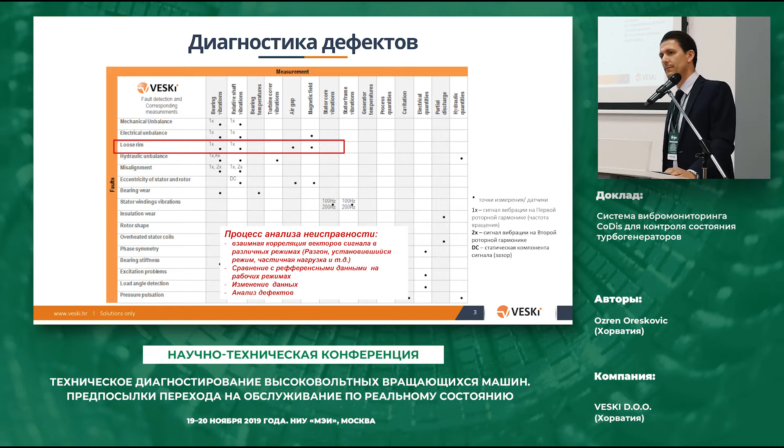And then do that for other signals that we need to address the problem. And then we need to combine the information together. But also, we need to know in which operating condition the machine works.

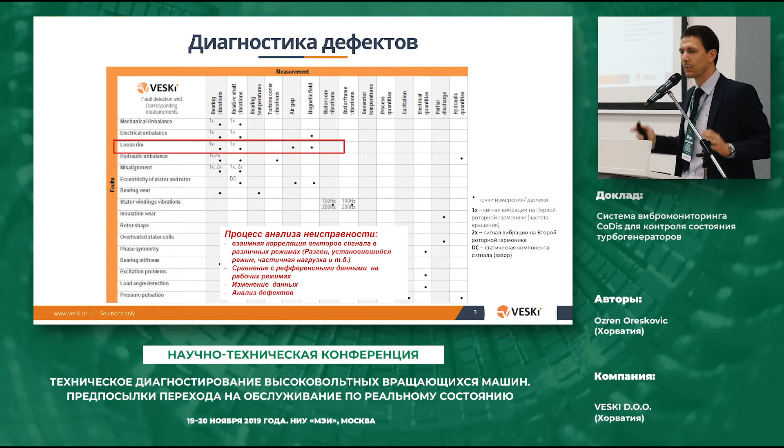So, of course, first we need to measure. So measurements are most essential.

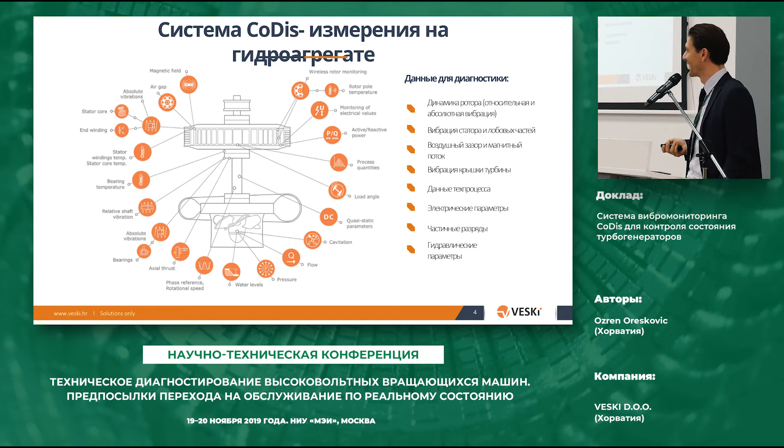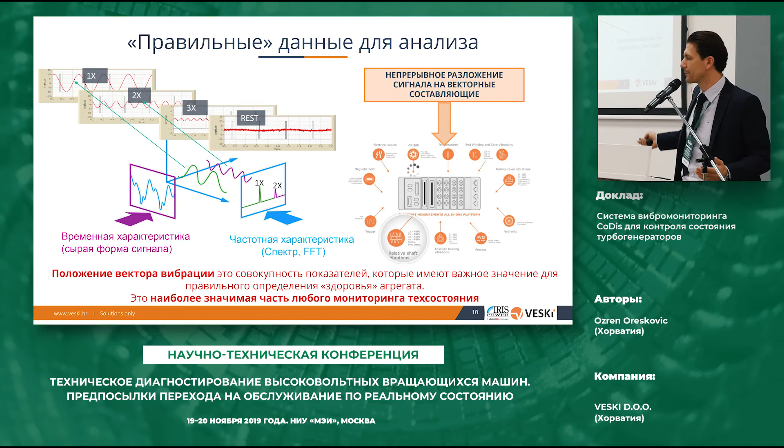And this is all based on industry standards.

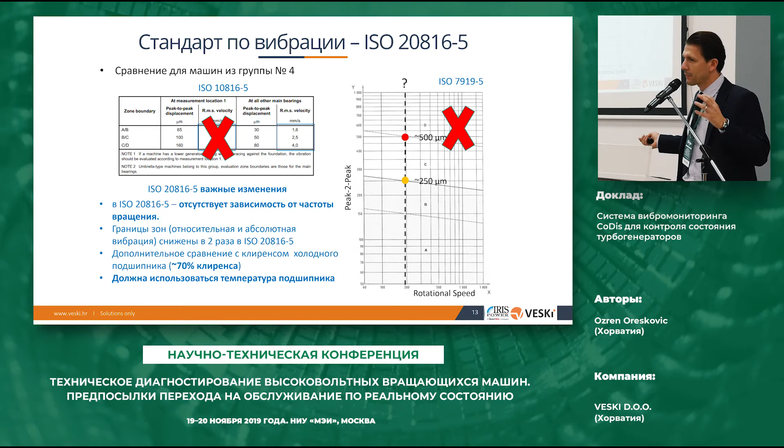The new standard is basically a little bit better and it focuses on an actual physical phenomenon rather than just a number.

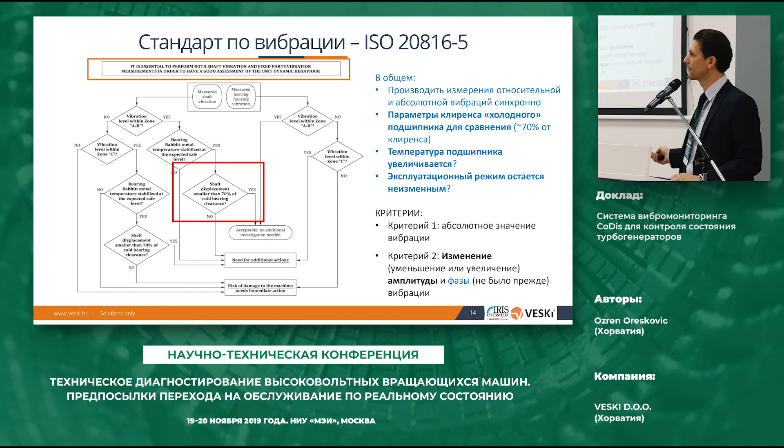I'm skipping slides because I have only 3 minutes. I thought I had 20, 30.

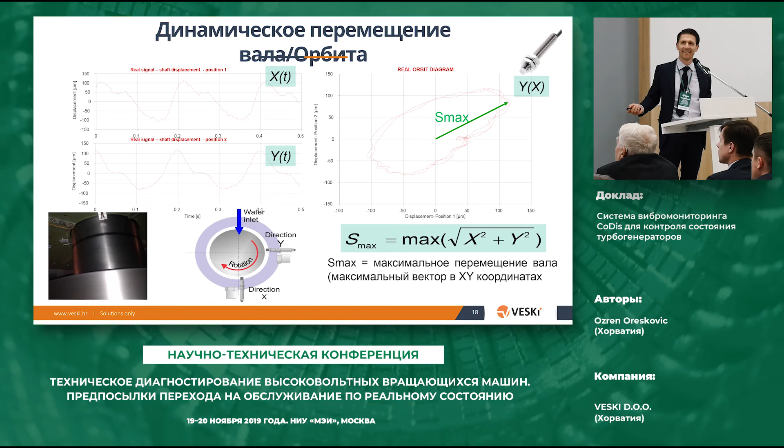So the idea is basically to correlate all the data and make the diagnostic functionality easy to interpret.

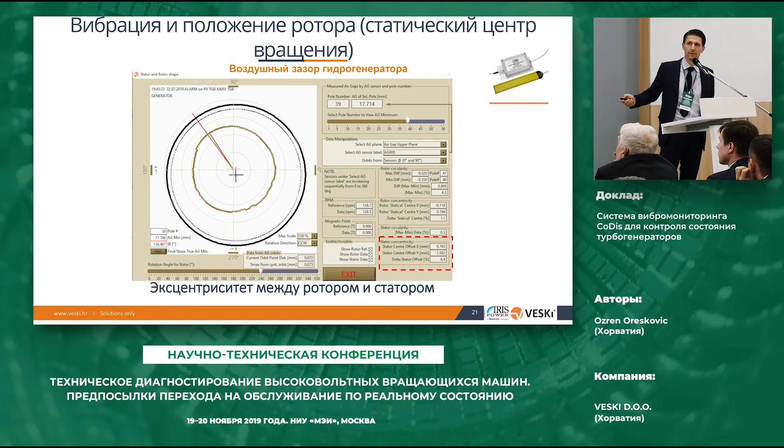You want to see how it affects your bearings.

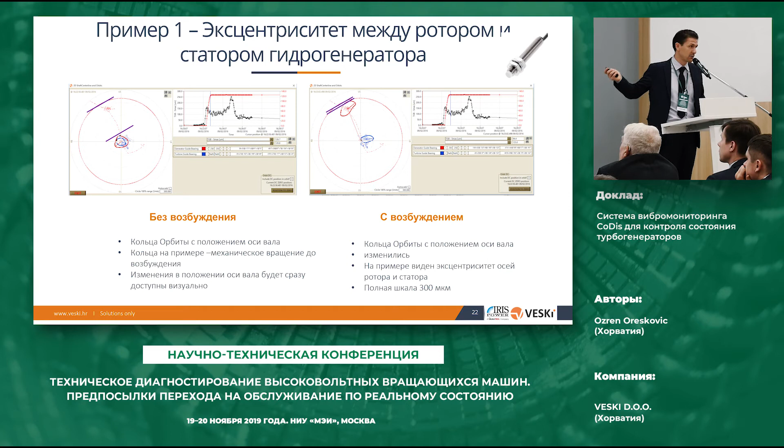So, do I have a shaft vibration changing, or do I have a bearing vibration changing?

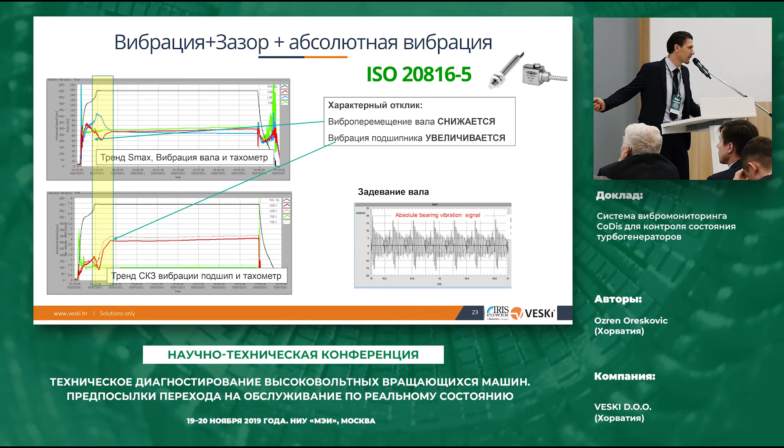And then, when you have the data, you are able to correlate basically whatever you want.

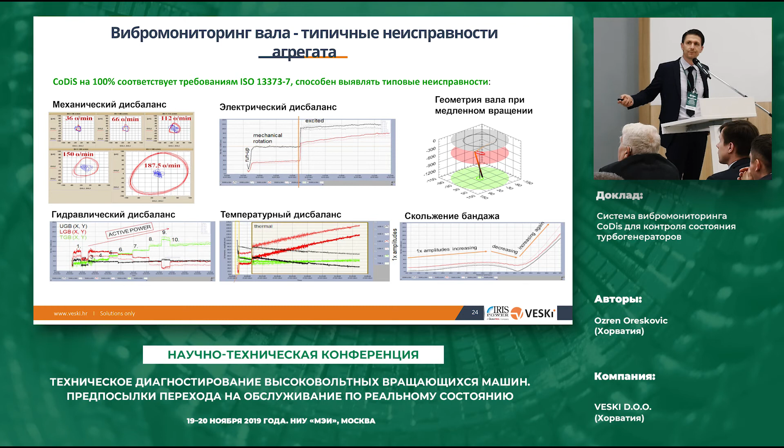Regardless of the measurement type, the fault will be there.

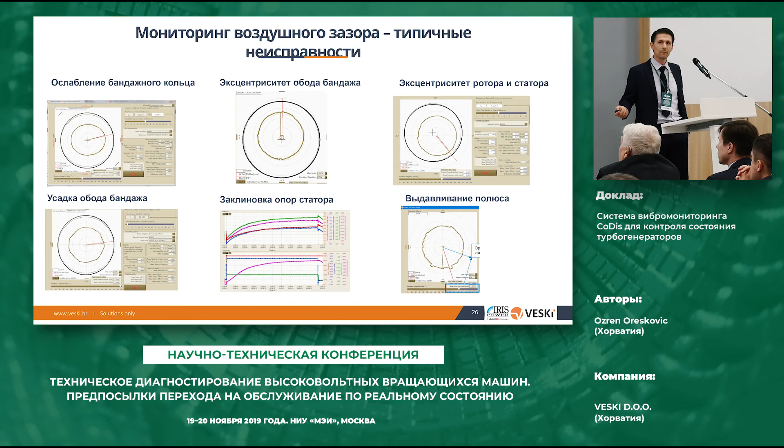So it can be either flux, это может быть магнитный поток, or air gap, или воздушный зазор, or vibrations, вибрации of different parts of the machine.

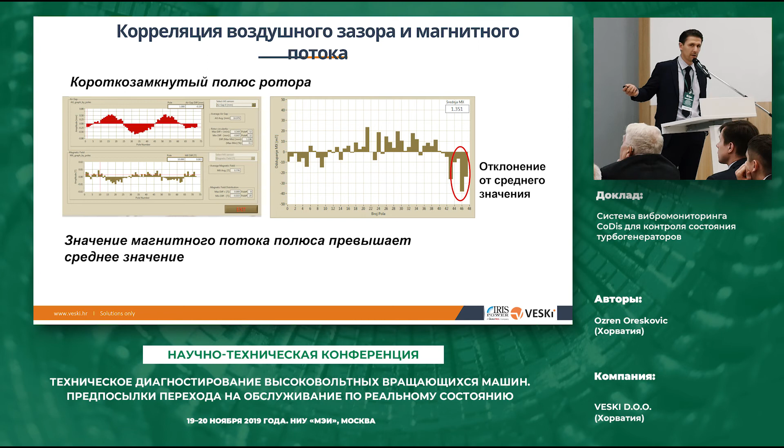It's all the same. Basically, it's all the same philosophy. It's all about the data.